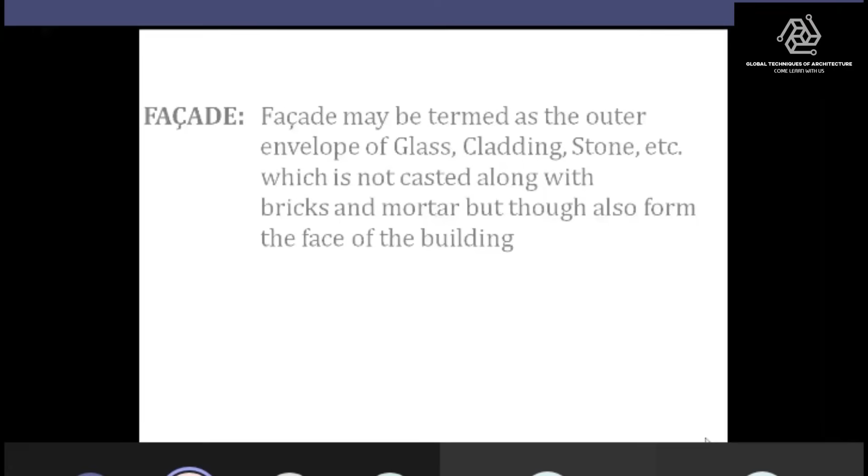Because of facades, you get many iconic shapes for buildings. Now comes the question, why facade? These are points that must be known to every designer, every architect, every guy working in the construction field, so he can answer his seniors and the next generation coming into the construction industry.

It gives you corporate identity, unique shapes, complex designs, results in architectural wonder, pleasing material, see-through elevation, lively building elevations, and also better acoustical performance.

It's a genuine request to all the engineers and architects listening to me that we have ventured into a generation with a very different and varied kind of university called WhatsApp University. My request is don't believe things until you verify them. There are series of photographs where facades are blamed for fire, facades are blamed for excessive heat generated. With the help of a knowledgeable consultant, you can get rid of all these queries.

Facade is not to be blamed, because it gives many advantages over the conventional design, the normal design we used to follow 20, 30 years back. Whatever functionality the facade used to give us, we are now supposed to achieve with the help of a small thickness of glass.

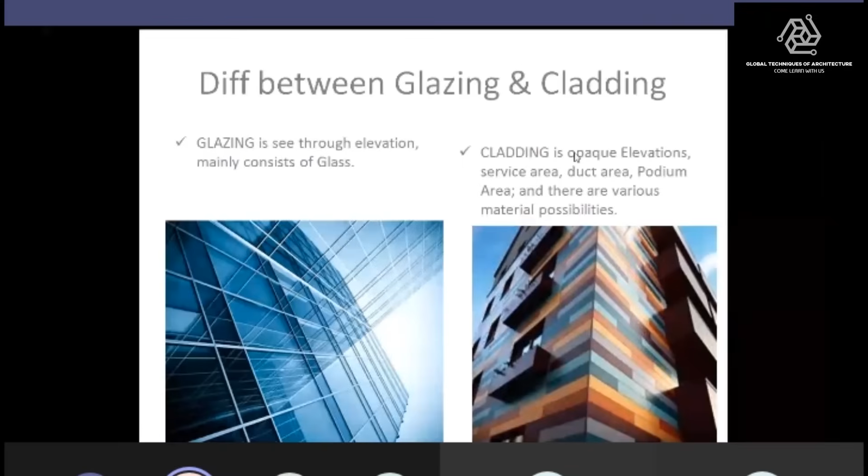Now we come to the materials which are used in facades. The presentation would be much more elaborative, but if you have a notepad, it would make it easier to remember and sail through the presentation without getting dizzy about it. So we'll just touch base with the basic materials which are used and are of much more concern to us. First and foremost, the material we are interested to know is glass.

If you are ready with the notepad, the three statements on your screen, please memorize it, note it down, take a screenshot. Glass as a subject is of ocean's depth. We are not getting into the ocean, but just trying to gain knowledge for facades, for our day-to-day activities, for normal construction activities - what type of glasses are used, where it is used, and how to arrange the configuration of it.

The first statement goes: generally in facade, heat strengthened glasses are to be used. When I say heat strengthened, I'll explain it. Whenever there is a drilled hole in glass, only there use FT glass. What is FT glass? What is fully tempered glass? We'll understand in due course of the presentation.

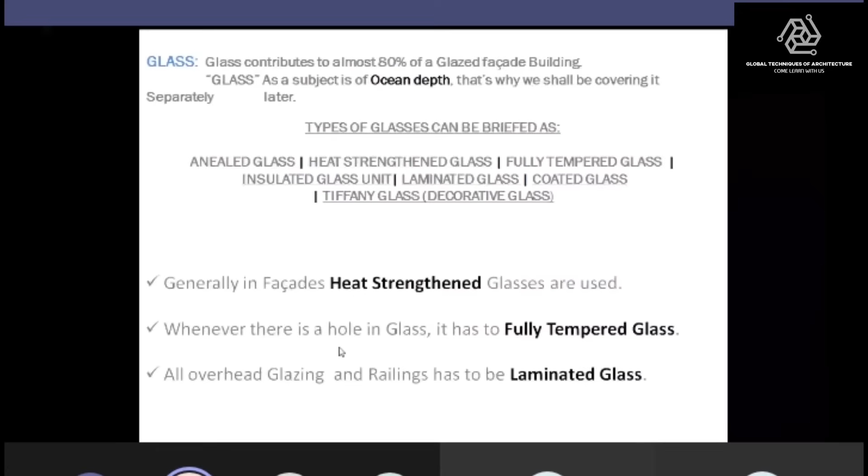Heat strengthened glass has some beautiful mechanical properties: thermal shock resistance up to 130 degrees, 2 times stronger than annealed glass, but the only issue is it breaks down in knife edges. These are the patterns into which it shatters. So next time you see a broken glass, go near it and see if the pattern is of knife edges - by default, it is either annealed or heat strengthened.

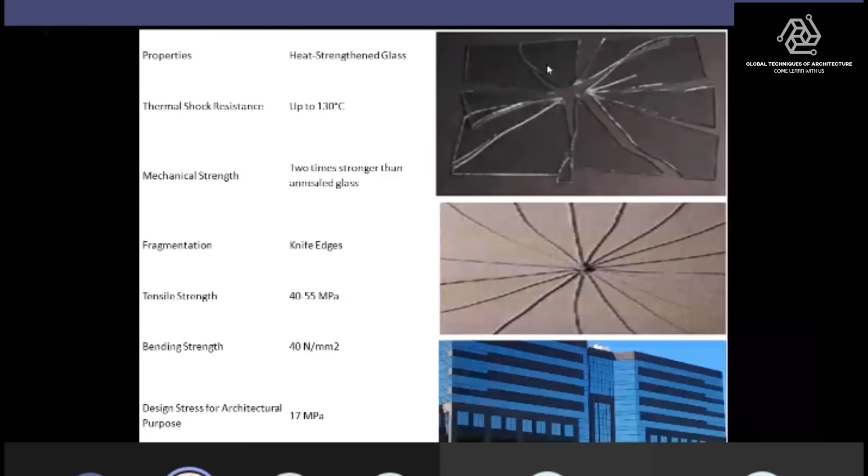Now comes the FT glass, or tempered or toughened glass. The mechanical strength of FT glass is 4 times the mechanical strength of annealed glass. This entire process is called rapid cooling. We heat the glass to 700 degrees Celsius and then rapid cool it.

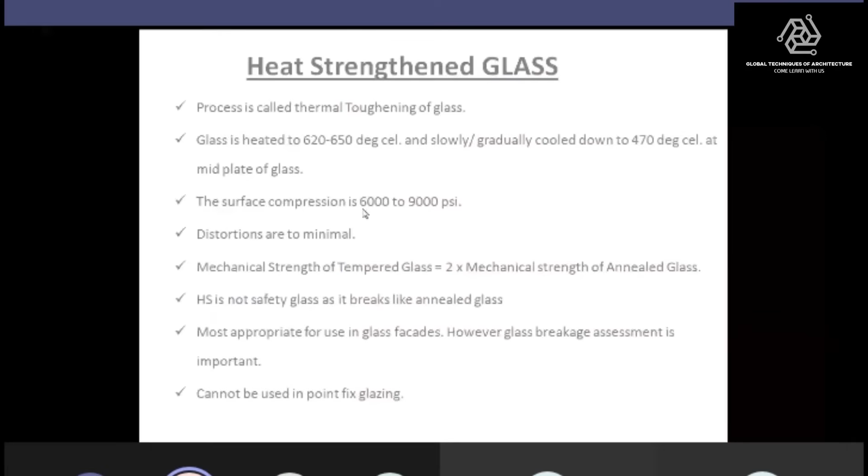There is forced convection, with cool air blown from both sides, up and down the glass. This causes the surface compression to be more. Here we get a surface compression of 6,000 to 9,000 per square inch, whereas here we get 11,000 to 20,000 per square inch.

But since it is quenching, this process is called quenching, so we have more distortion due to sudden cooling of glass. It is also called FT glass, and it is also called safety glass.

Now, many of us, say 99% of us, use mobiles, and on that mobile we consistently use what's sold as FT glass, third-party glass. We buy it and allow it to stick to the screen. But believe me, we are all fooled by the sellers—it is not glass, it is fiber. If that thin glass were actually to be manufactured, the cost would be equivalent to that of a cell phone. So that's not FT glass.

Now comes the problem part of nickel sulfide. One problem we consistently see in tempered glass is spontaneous breakage. The glass is there one day and suddenly it breaks. It is also called the ghost effect. This nickel sulfide is a particle inside the glass as an impurity, and whenever this glass is exposed to the atmosphere during 3 to 5 weather cycles, this nickel sulfide, being a metal, tries to expand and shatters the glass.

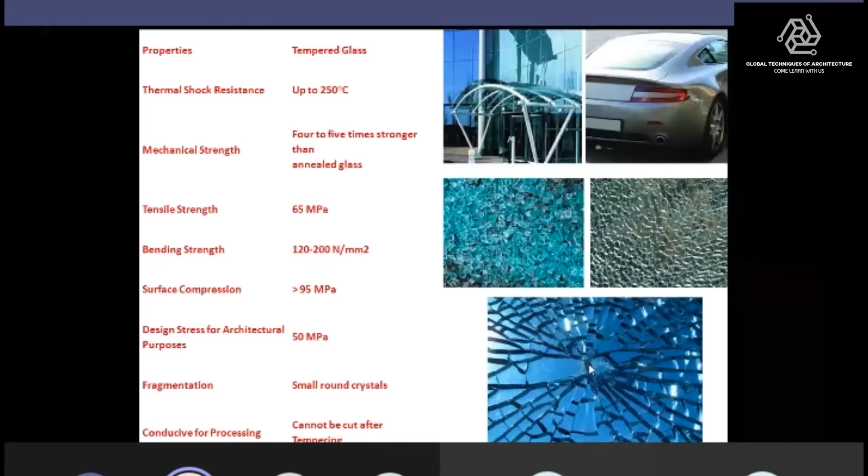Now, to eliminate this nickel sulfide, this NiS, we have a process called heat soaking. In heat soaking, the entire lot of glass is allowed to again go into the furnace. When this glass entirely goes into the furnace, whichever glass has nickel sulfide shatters on its own. So it is again heated.

So you can see the tempering process increases the strength of glass manifold, and because of spontaneous breakage, when glass is heated, nickel sulfide is formed. But when this glass is again heated, inclusions are modified into a form that grows and transforms. Nickel sulfide can change its structure and volume during the heating process. So whatever happens in this heat soak in the furnace gets you the perfect glasses out of it.

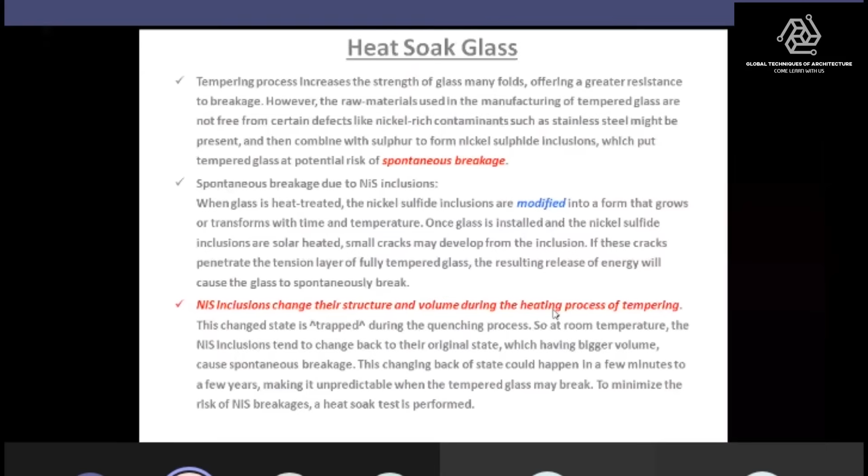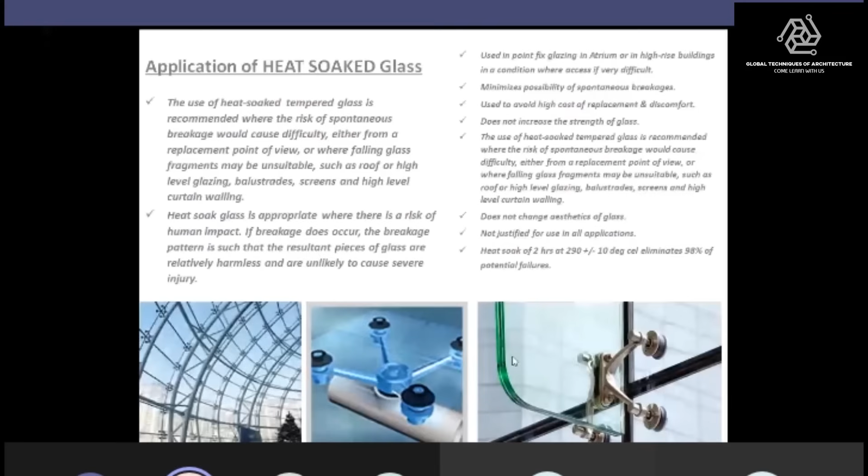But of course, it's a costly affair. So where do we use this heat soak test? Heat soaked glass is to be used when there is overhead glazing. Wherever there is a glass fin system like this, you have to use heat soaking for this part, because this part is a structural member out there.

Then comes laminated glass. So when I say laminated glass—we understood HS glass, which was 2 times stronger, and we understood fully tempered FT glass, which was 4 times stronger. Now when we see laminated glass, we require a safety of more than 4 times that of annealed glass. That's why we took two glasses together and laminated them with the help of a resin between them, with the help of a glue.

So it's a mechanical definition: any two homogeneous materials stuck together with the help of a glue, a layer, or a resin is called lamination. We used that same phenomenon with glass, and when we use this with glass, we get a laminated glass. You see this, called the first lite, and the second lite, of course, is also called glass. And then we have a PVB interlayer.

This PVB is now being replaced by a company called Kuraray. We also know it as SentryGlas Plus, SGP.

PVB in nature was hygroscopic, it used to love water. So if there is a laminated glass and it sees water during rains or during cleaning, it absorbs water and it delaminates. In that due course, the entire purpose of lamination, of having more than four times strength, is lost. Then this company did its R&D and came up with a product called SGP.

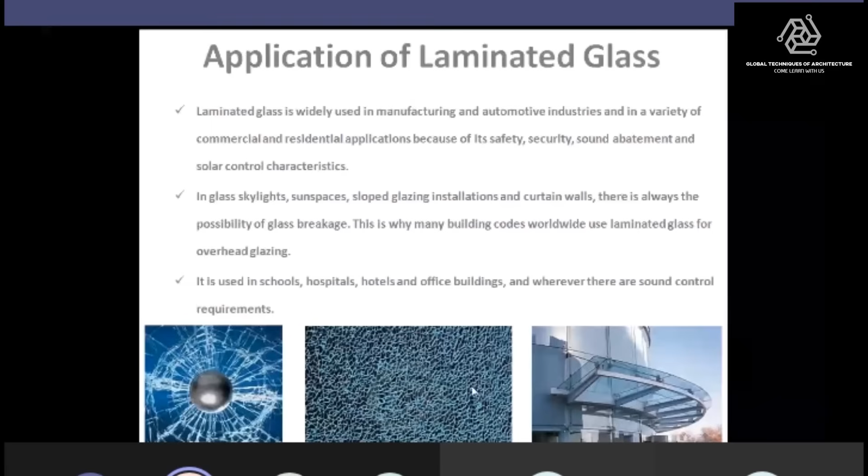So these are two glasses. Now, when IG is to be used and when there is a laminated glass to be used, there is much more confusion in civil engineering fraternity. There are many people who say double glass laga lenge.

When I say double glass, he means this also. The engineer means this also is also a double glass for him because it's laminated. There are two glasses, but there has to be someone to clarify whether the term double glass refers to an IGU or a laminated glass.

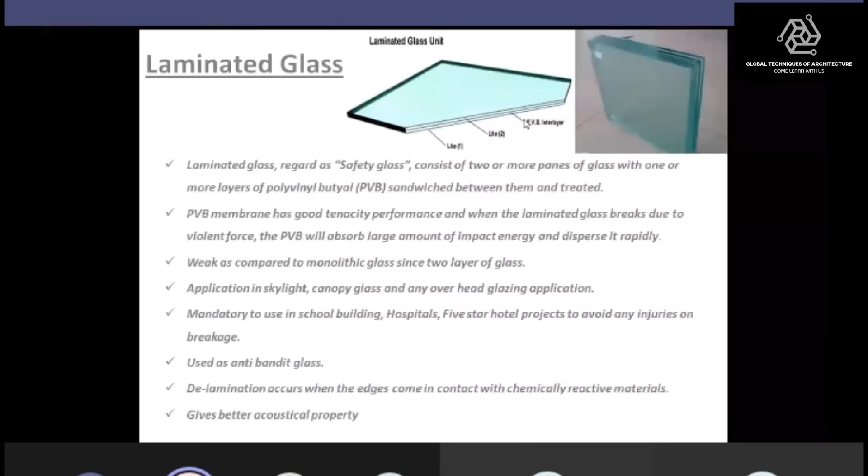So that's why I make a request that whenever next time you talk about glass, it should not be spoken of as double glass. It has to be quoted as insulated glass unit and laminated glass.

So laminated glass are to be used only for acoustic properties. Insulated glass are to be used for thermal properties only.

So when I say thermal properties, just a thing for you to remember is a normal refrigerator that we look at every refrigerator of Pepsi company, Coca-Cola, or any cooling company that gives you those soft drinks. They use this DGU, this insulated glass unit, to hold the temperature inside.

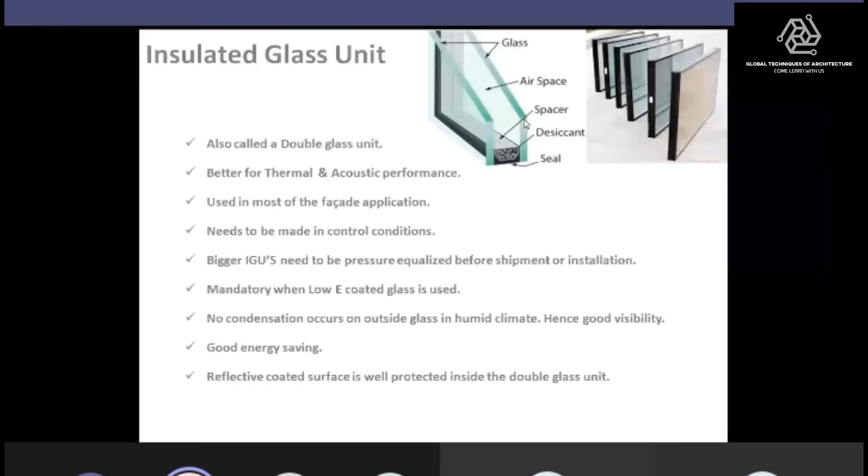So that is IGU. Whereas when you go to any five-star hotel just next to your airport and you look at the glass and you see vehicles passing by and you don't hear the sound, that is a laminated glass. So that completes the glass section, where we touched base about the various glass, where and how to be used.

Now we come back to various materials used in facades. So we start with stone. Stone, of course, was a favorite of all. Stone can be dry stone, it can be sandstone, it can be limestone, what do you call it, sedimentary stone, granite. Then we have bricks, which we had used very vastly throughout history. Glass, of course, we covered.

ACP - now when I say ACP, many of us think we know the subject, we've used it in many projects. But it's again a matter of concern, with the breakout of fires in and around many cities in and around the world, many of us are concerned about the usage of ACP.

Of course, the product is not faulty. It is the specification that was wrong. The guy who was writing down the specification must not have taken due course of attention.

So when I say ACP, these are two aluminum sheets stuck together with the help of a core. Now this core is the element which catches fire, if at all it is a non-FR material. So there are ACPs in the market which are non-FR and FR.

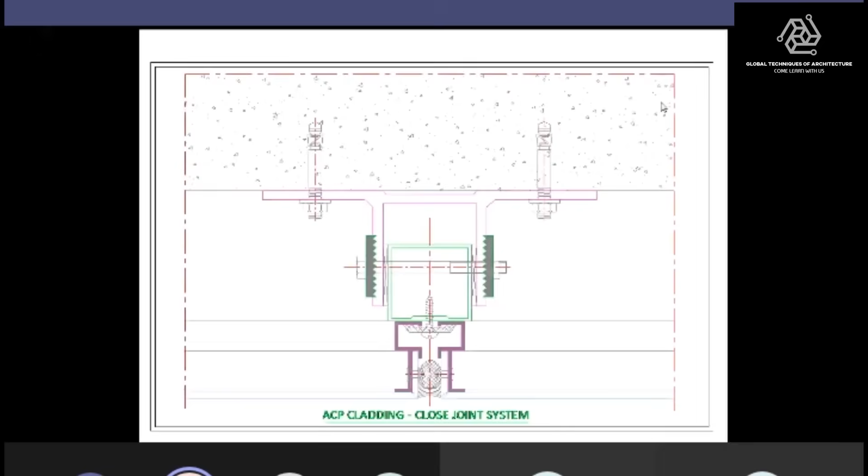So we as designers suggest not to go with the closed joint system. The closed joint system will look like this. So when you see an ACP, this is inside, this is outside. This blue part is the ACP, aluminum closed joint. So this would be the ACP. Of course, this system is very beautifully designed by us.

We see people directly sticking ACP on double-sided tape and then filling the gaps with the help of a backer rod and sealant. Believe me, this sealant gives you stain marks. You can see stains found on ACP facades, and the facade looks really shabby.

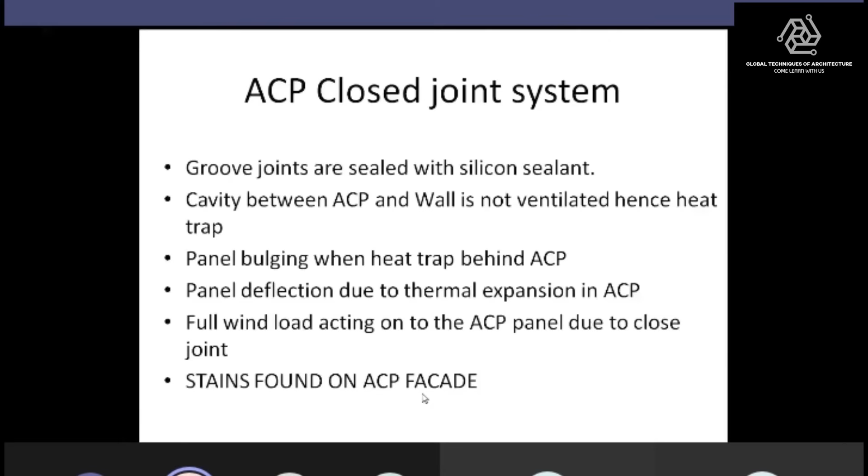And if we are designers... this system is, of course, very much a favorite of all the designers, but we as designers say no to this, because a dirty facade doesn't fetch anybody good value for money.

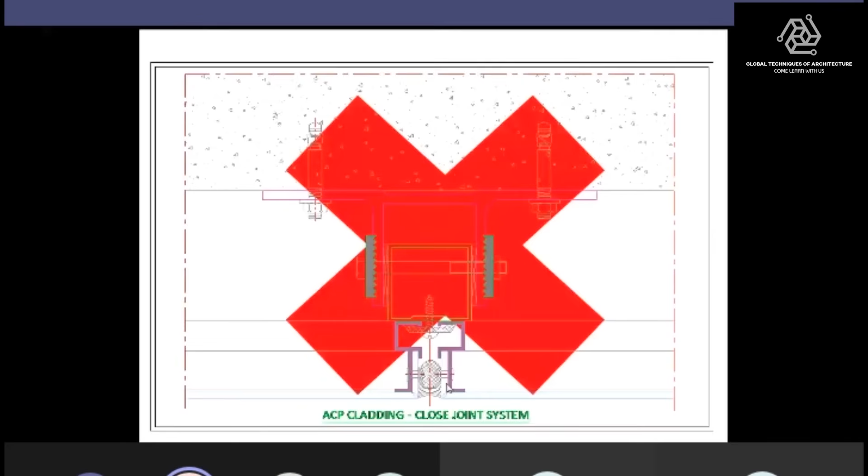So what is the solution for it? The solution is ACP in an open joint. Instead of that sealant, we go with the rainscreen principle. We allow the water to get inside behind the ACP, and we have drainage slots which allow the water to come out of the facade again. The entire cavity is called a ventilated cavity or rainscreen principle.

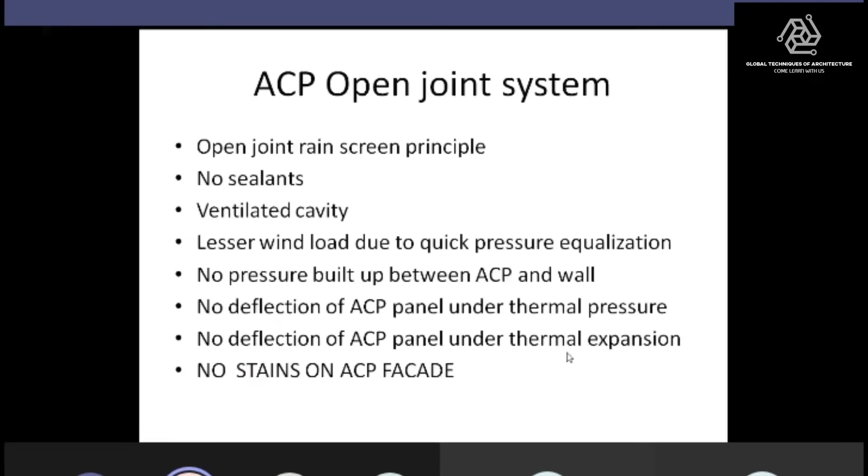No pressure build-up between the ACP and the wall. No deflection of panel under thermal expansion. No stains on the ACP at all. So the detail that you see looks like this.

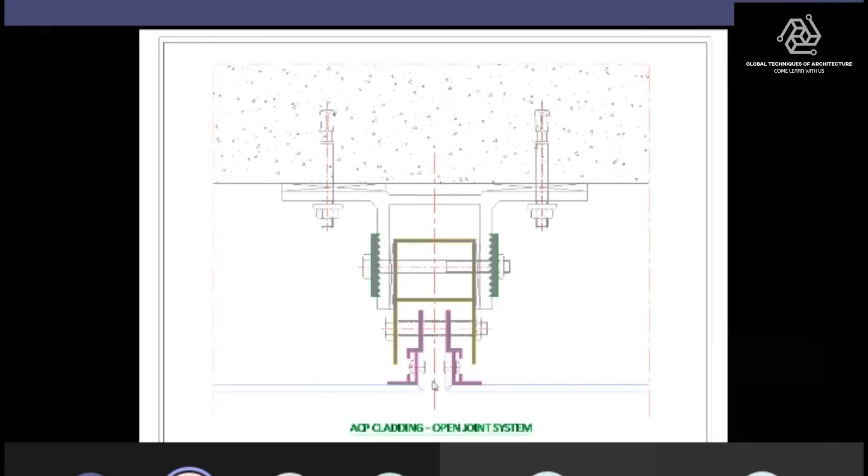It just slightly comes outside the building periphery, because we are using this as an additional member - this frame, the gray color. You again have an ACP and you don't see a sealant. This gap, a standard gap maintained which we ask for, is 10 to 15 mm, depending upon the architect's choice. So this is the perfect system we are talking of. Then, of course, for the podium area, we have much more doubt about what to use, what not to use.

So I have compiled some beautiful products for you. We'll just go through the photographs so that we don't feel that we're looking at new materials, and we don't feel that it's a boring session.

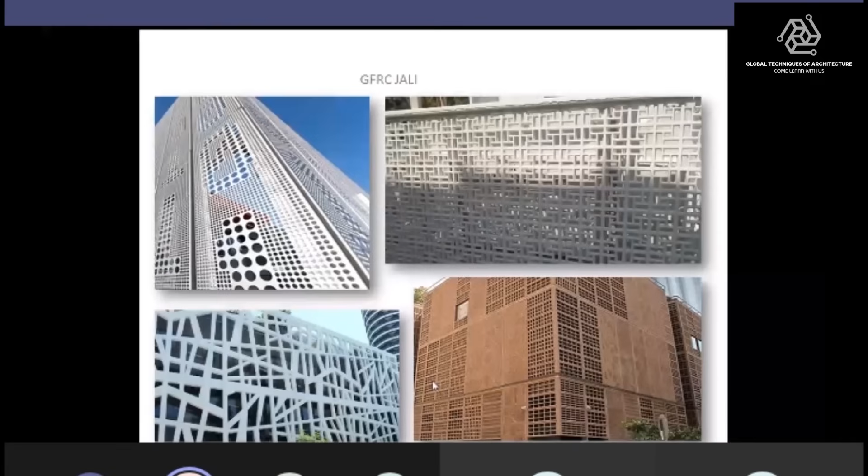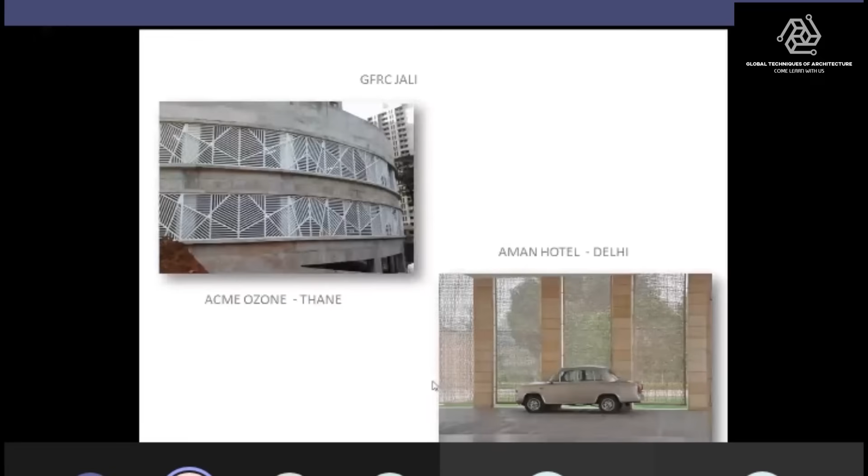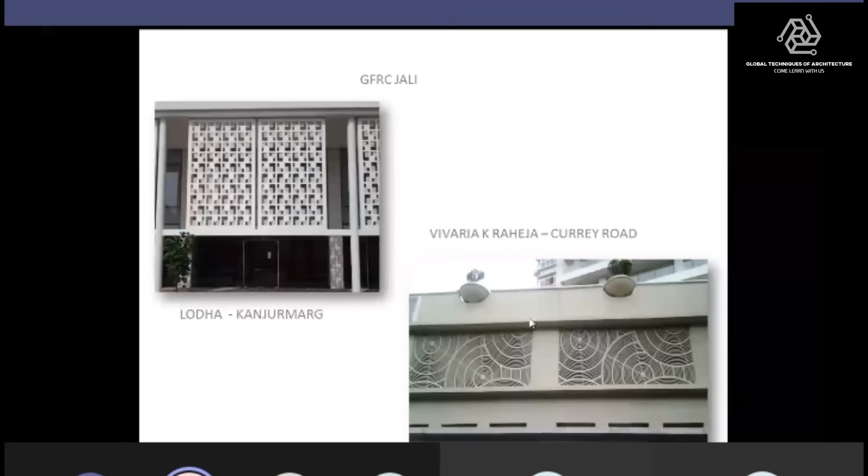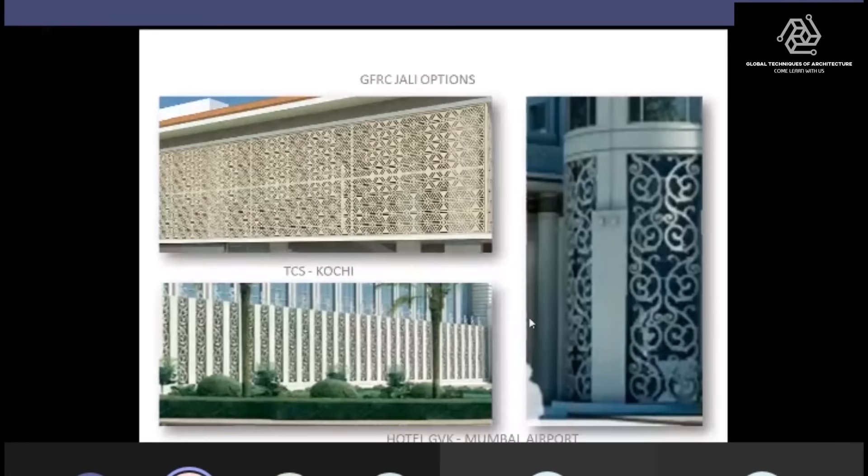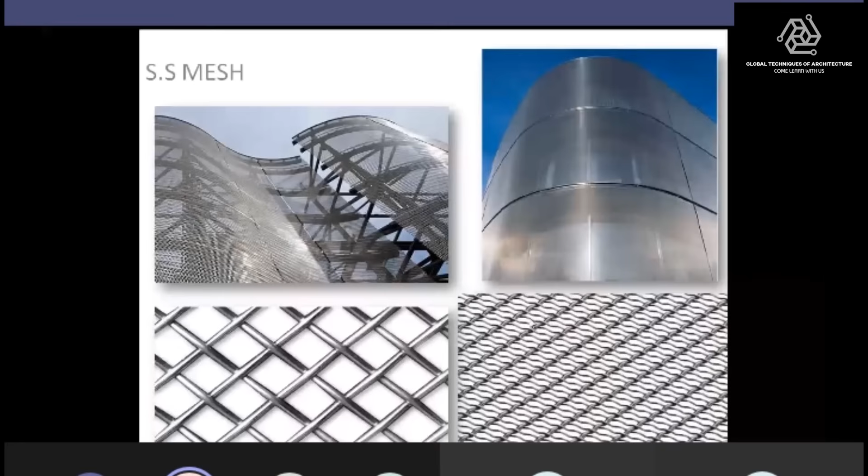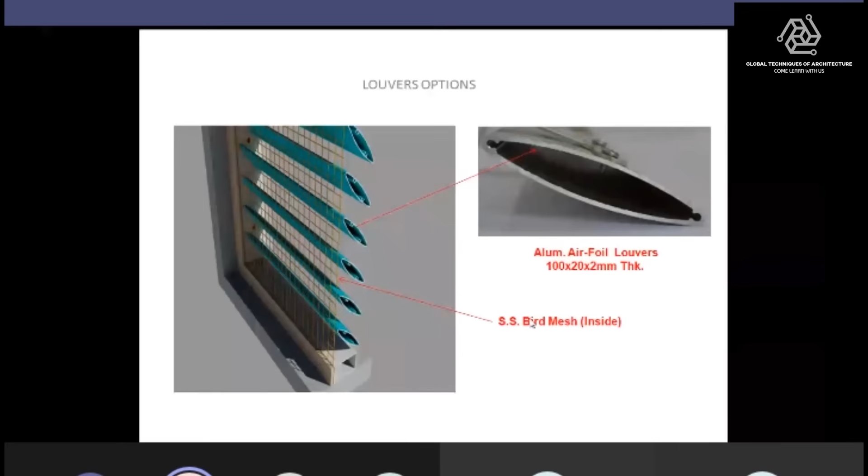Aluminum louvers - now since architecture in India has also started evolving, we come across louvers in many projects wherein the client asks for automation into it. So these are fixed louvers, and the first photograph shows automated louvers.

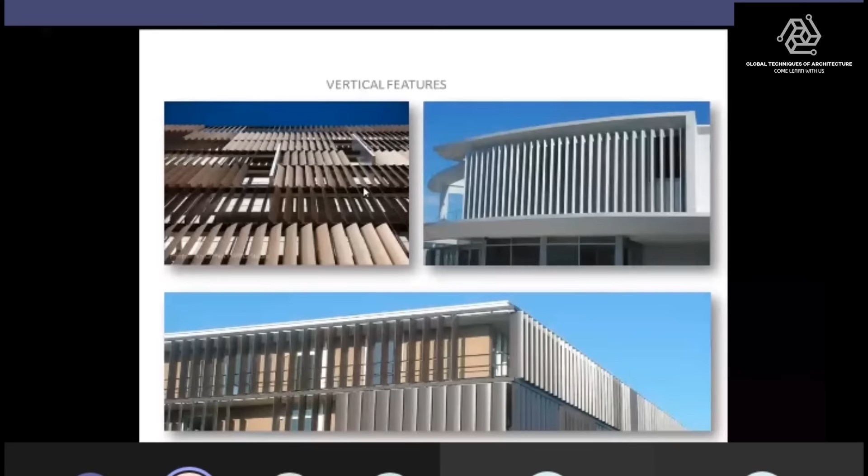Aluminum vertical features, we also call them louvers. These are photographs from the internet showing dynamic louvers, and here are the fixed ones. These are again glass used as vertical features, which falls under the category of louvers only, but this also helps as a self-shading device.

Shera boards, of course, is a known product.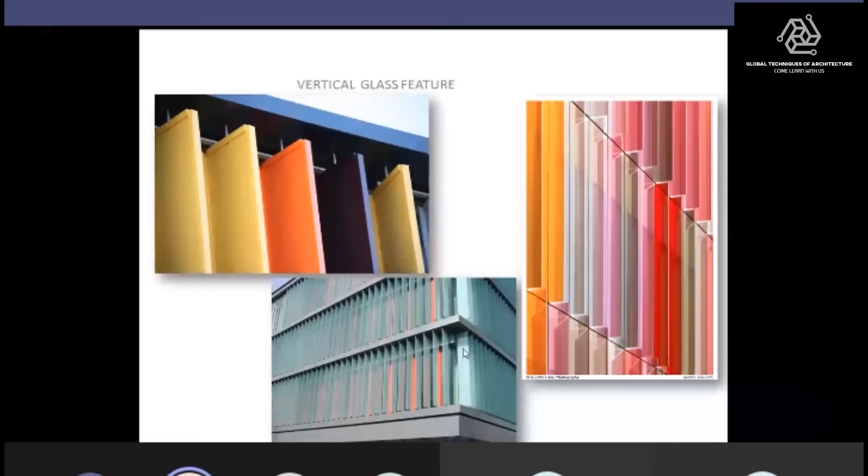Zinc cladding - now zinc as a product is a beautiful material, and the beauty of it is it doesn't fade away with time. They also have ZCP, zinc composite panel, but zinc as a material, if you put it onto your elevation, it gives you much more aesthetic appeal. The richness, or say the glow for the entire building, is superb.

Corian cladding - as designers, I have my own hesitations to put this onto the exterior. Onto the Worli, the tallest tower that we see - Shriram Mills, the Palais Royal or Palace Royal, many people say - the intent is to go with Corian cladding. I don't know when it will be finishing off, but whenever it finishes, Corian would be used for the first time as an external material in India.

These photographs are all from the internet, of various projects by friends and colleagues. It looks beautiful, it remains white. I don't know how it reacts to dust and the climate that we are in.

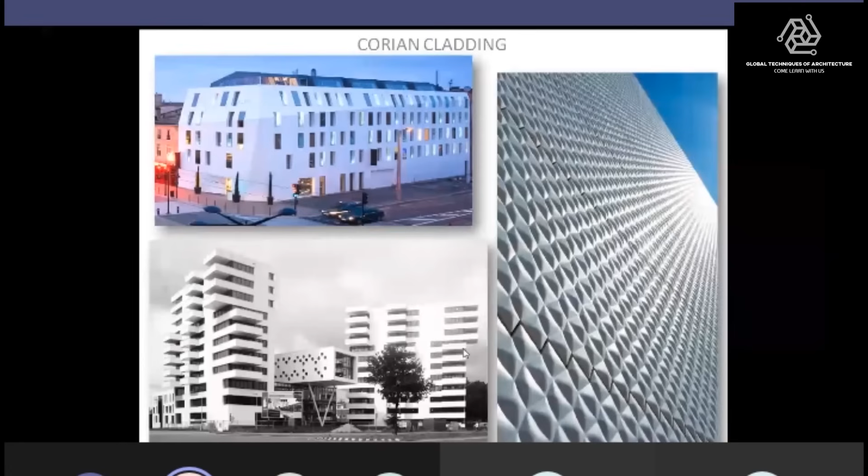Then we have a product called fiber reinforced plastic. Of course, this product is not sold in India because of the NBC - the NBC says no plastic materials are to be used on elevations, as it is combustible in nature.

Wood veneer cladding is known to many of us. We use veneer cladding onto the exterior.

Natural clay tile, also known as terracotta - many of your KRC projects have it. These are extruded like aluminum; the tiles are extruded in nature.

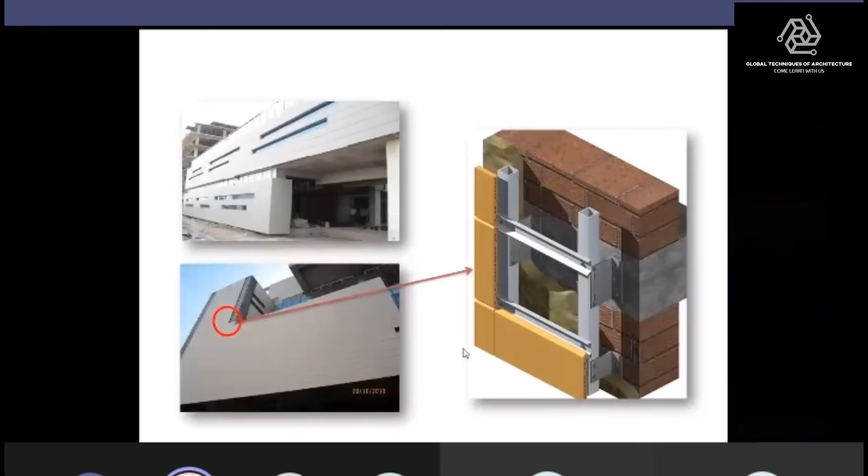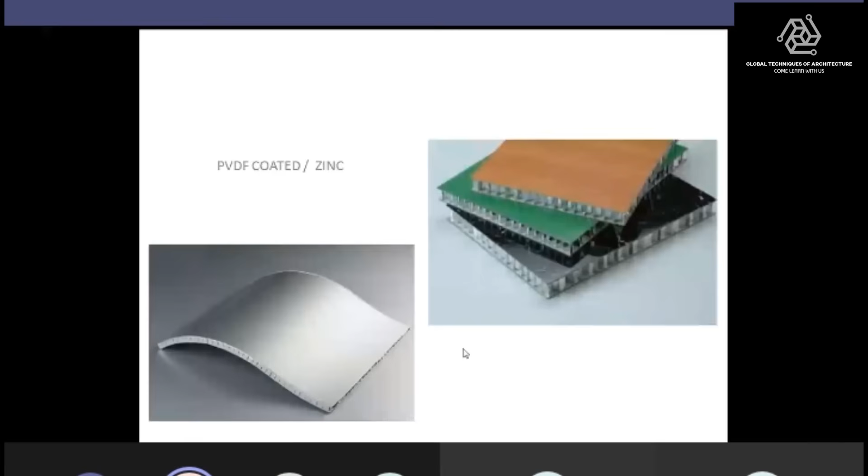Then we have honeycomb panels - these are some of my favorites, wherein a thin slit of granite is stuck to a honeycomb like this, and the weight exerted by the granite on the civil structure is reduced to a quarter. So if 1 square meter of granite 30mm thick weighs 80 kgs, by using this honeycomb system you'd be utilizing only 20 kgs, and yet the look and feel would appear as granite only.

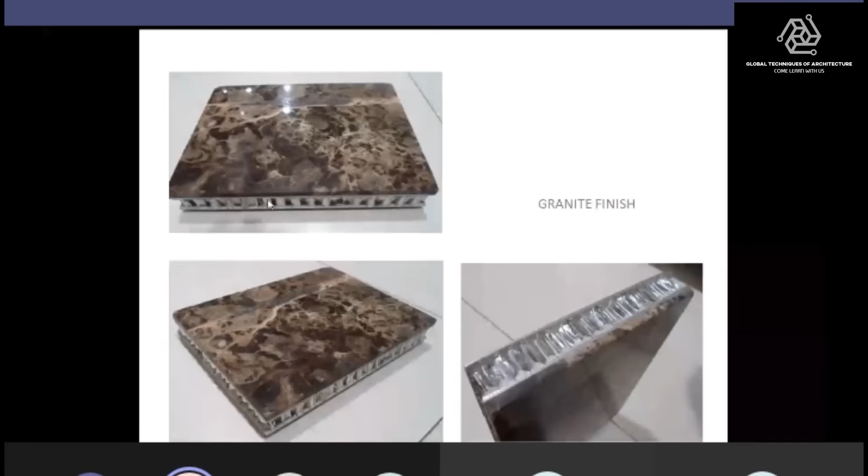Then we have vitrified porcelain slabs, vitrified tiles, and porcelain tiles. Now this is a new material which was also explained to the KRC team for various projects, for the cladding part and for the spandrel area insulation.

Instead of ACP, we can use porcelain tiles which have just a thickness of 3mm and exert minimum load onto the structure used for facade. The best part about these porcelain tiles is that they have an anti-shatter mechanism of film or mesh behind them, so even in the worst-case scenario if it shatters, it doesn't fall off easily.

We have one project at Thane which we did with a similar product called Laminam for Deepak Goradia Saab. Dosti Imperial is the project's name. Whenever you are free, after lockdown of course, you can go and have a look at it. It looks really beautiful.

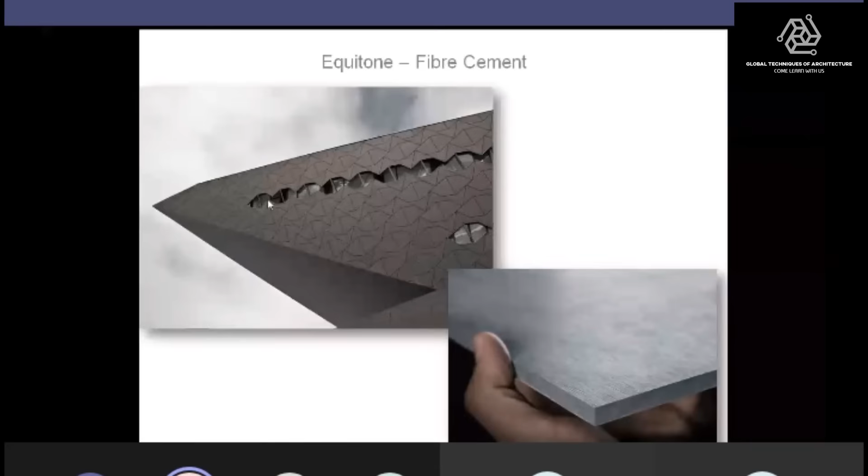Ceramic tiles are known to all, fiber cement boards are also known. I've clubbed all these materials together just to have a knowledge about them. Yes, these are the materials we know, but I'm presenting it to you consolidated.

HPL, as a designer, I have my own limitations and questions about it, but as a product it's been widely and variedly used across the world. As a mechanical engineer, I found this material to be of much more concern because the base of the material is paper. The laminate is created by pressing 60 sheets of paper, gluing them together, pressing them and rolling it out in the form of a sheet. So the manufacturer says it comes with a fire-rated property because of the glue, and no weathering effect. But somewhere I have my own limitations on using this material for the external part. Yes, these have been widely used across the globe.

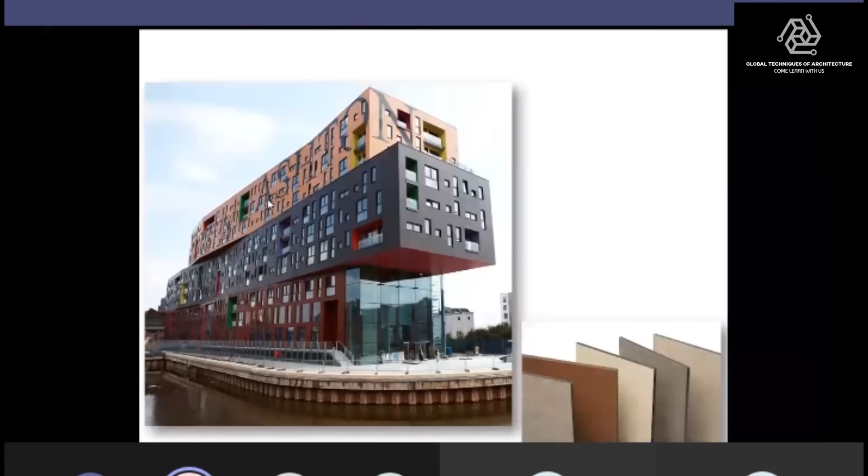Then we start with the basic system, curtain wall, aluminum system. When I say aluminum system, there are many doubts among people - what is a curtain wall, why is it being used? In this session, we are not covering windows and railings, only facade systems for commercial buildings, since we are talking to the KRC team. So what is a curtain wall?

Curtain wall is defined as a thin, usually aluminum framed wall containing infill of glass, going from floor to floor. So some basics we need to revive - horizontal members, you all must be knowing this too. Horizontal members are called transoms, we'll be addressing them as transoms. The vertical ones would be called mullions.

These are casting channels. At the time of installation, at the time of casting itself, these casting channels are taken near to the edge of the slab, marking a minimum distance around 100 to 150. These are installed and ready to receive the facade. The bracket is used and can be installed by just inserting the anchor into the casting channel. And then, of course, some spider glazing and spigots.

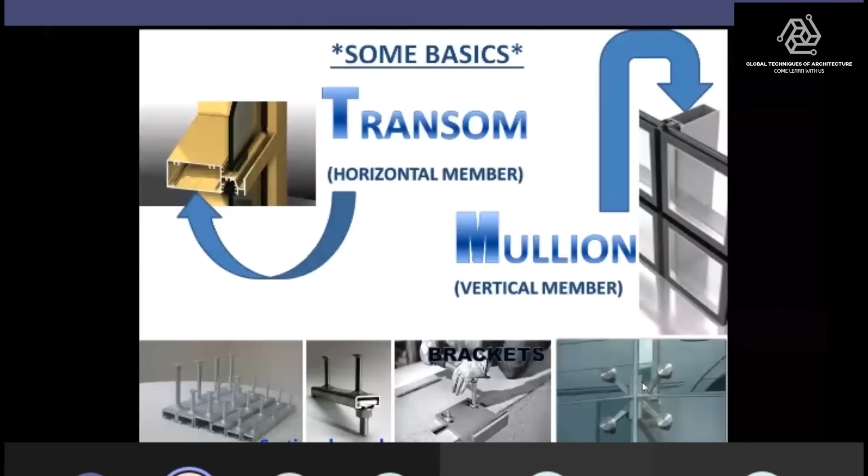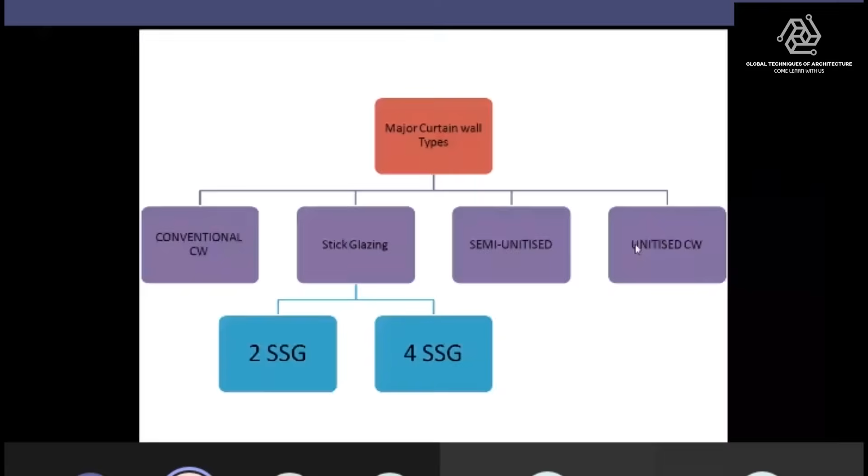So these are the things we are going to cover - major curtain wall types. We started with conventional, the name itself suggests conventional, purana, old. Then we came up with stick glazing. The entire facade fraternity started from curtain wall, went to stick glazing, went to semi-unitized, now unitized. If the KRC team allows me to present in the next session, we would talk about futuristic facade - how will the future look like? So first of all, we are covering till now, say 2020. What will the facade look like?

So we start with conventional curtain wall. What is a conventional curtain wall? Normally this is a detail which was used 20 years ago, 15 years ago. You see this horizontal member, transom. The glass being mechanically held - the glass is held with the help of this metal, and we avoid metal-to-glass contact by using these gaskets. The glass is fixed to this frame with the help of this pressure plate, and then we have the cover cap. The architects don't like to see nuts, bolts and screws, of course, so we see this screw is being hidden.

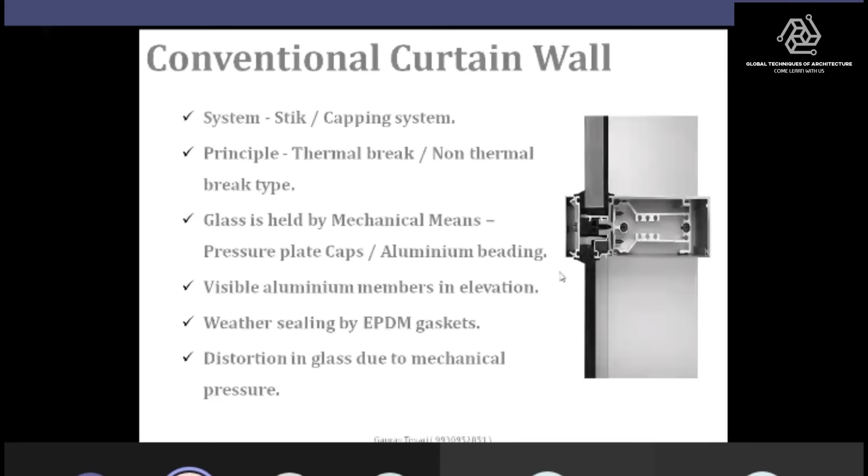Now with the usage of this diagram - of course we all are engineers, we love to see the exploded view - how will it look, how will it look? So that's the vertical mullion, that's the horizontal transom. The transom gets screwed to the main mullion with the help of these fixtures.

Then we have this gasket. This is the pressure plate with the gasket that holds the glass, and then there is a cover cap. Now this cover cap can be of any shape - square, elongated rectangle, aerofoil, or bull nose.

Now, as designers and engineers, we are happy about designing this system. We can install glass perfectly fine. Now what happens is it is labor dependent, and you require scaffolding, the H frame, or what we locally call paranchi. So paranchi is a need of the time here.

We have to use paranchi for 100% installation, and the installation happens from the outside periphery. Now imagine a project like Kohinoor Square or Ruby Tower, wherein there is just a road on the outside of the project. Can you erect a paranchi there? The answer is no.

And also, since it is labor dependent, and since these gaskets were initially used as rubber gaskets, due to weathering of heat and cold, they used to shrink. So when they used to shrink, they used to allow water to get inside the system and cause possible leakage. Also, since it is labor intensive, laborers are supposed to carry smaller glasses and cannot utilize bigger glass panels.

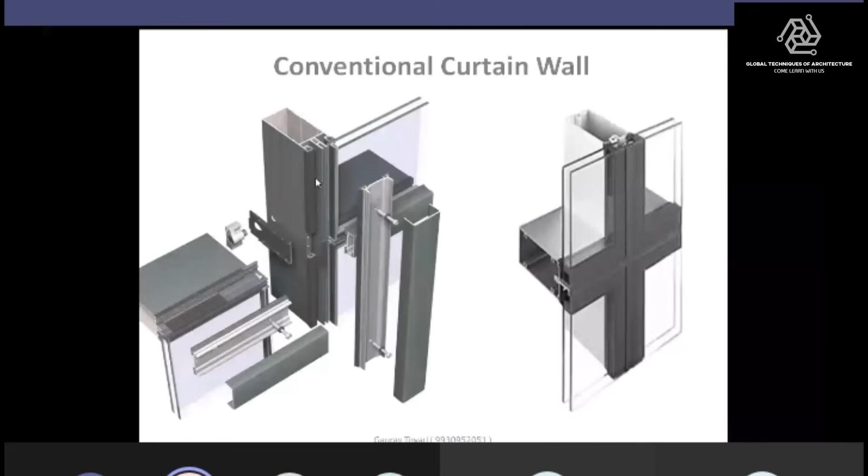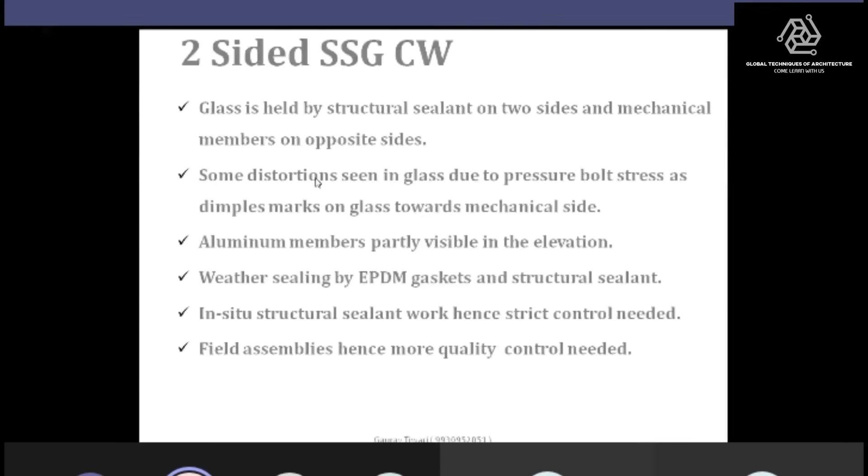So then we came up with a beautiful system using sealant. We decided to cover two parts of that rectangle glass, either vertical or horizontal, using two-sided structurally glazed sealant. So here if you see, these parts are with sealant - the vertical ones are with sealant and the horizontal ones are with a pressure plate cover cap. So wherever you see a horizontal band, it's a two-sided SSG, two-sided structurally glazed curtain wall.

So still the difference is you need scaffolding. Still there are dimple marks onto the glass. Still the architect's perspective is not served. So then we as designers came up...

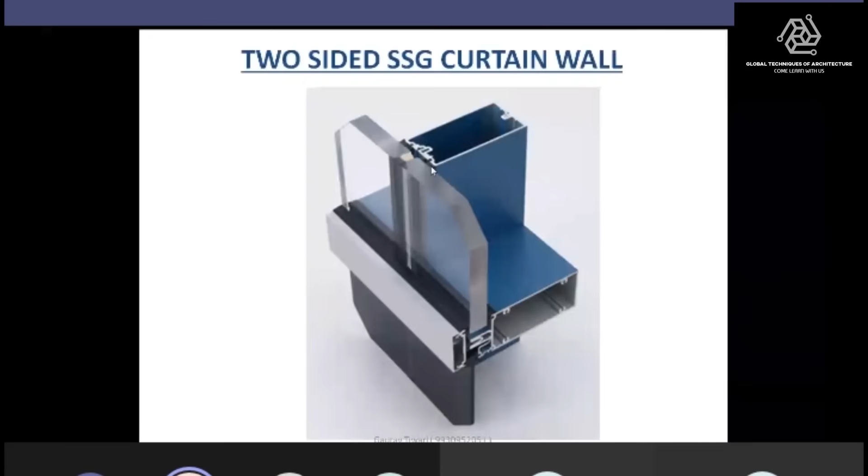...with the solution of utilizing structural sealant on the entire four sides. So when I say usage of this into all four sides, we said okay, let's go with four-sided structurally glazed. So glass is held by structural sealants on all four sides, with no visible aluminum member from the outside.

So the usage of four-sided created an architect-friendly environment wherein he wanted a glass-to-glass joint. He didn't want to see any aluminum visible from outside, either horizontal or vertical, and there's less distortion since there is no pressure plate and screw mechanism.

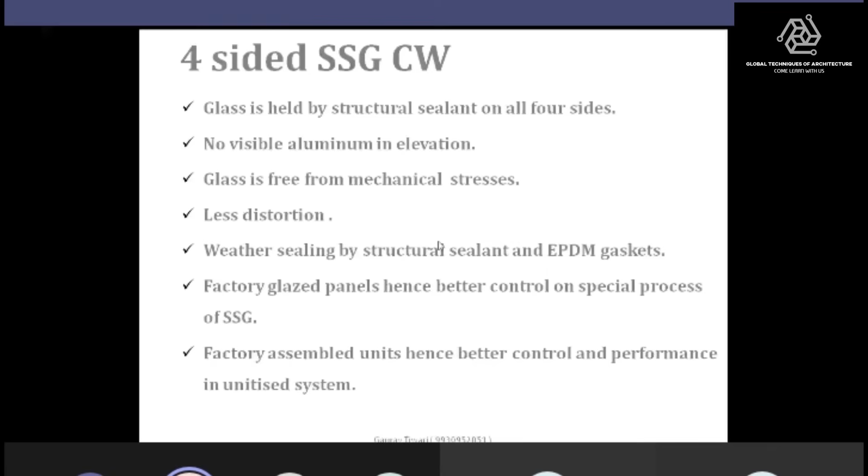Weather sealant with the help of EPDM gaskets - initially it was sealant, now we have started using EPDM gaskets. So this is the thing wherein initially we started using a weather sealant to fill the gap, and now this entirely is a glass to glass joint. You can see this glass to glass joint, and this is the weather seal. So the intention of the architect was 100% met, and he was very much happy about that. Yes, this is possible.

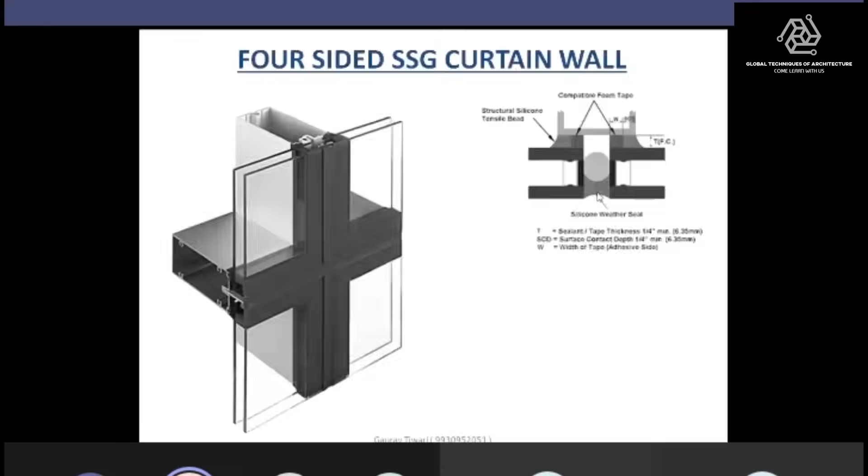Now, since we are capable of four-sided structurally glazed, we decided let's utilize a factory setup. So we decided to go with a semi-unitized curtain wall. Now, when I say semi, it means half. Unitized means a plug and play mechanism.

So if you look at it from the mobile perspective, initially we used to buy Nokia phones, say 15 to 20 years ago. Nokia phones used to come with a disk, a CD, a data cable which would be separate, a charger which would be separate, a hands-free which would be separate. Now we go and buy a smartphone, we spend more of course, but one data cable and one charger adapter serve many purposes, right? So that's called plug and play. So semi-unitized - unitized is just plug and play.

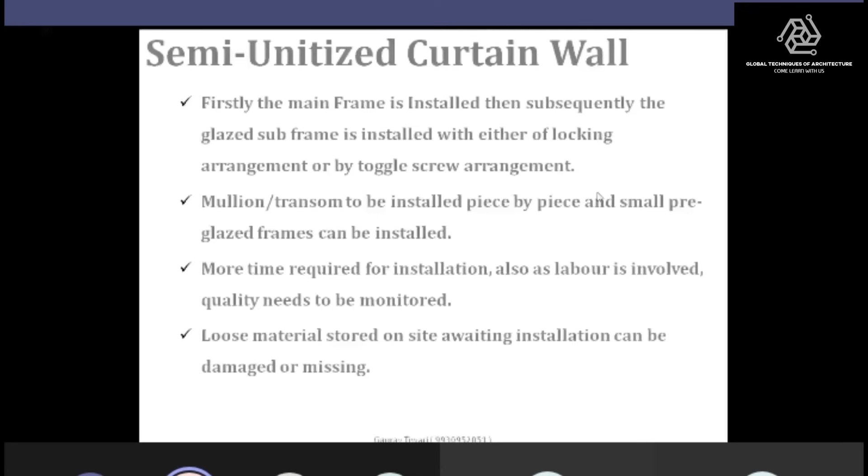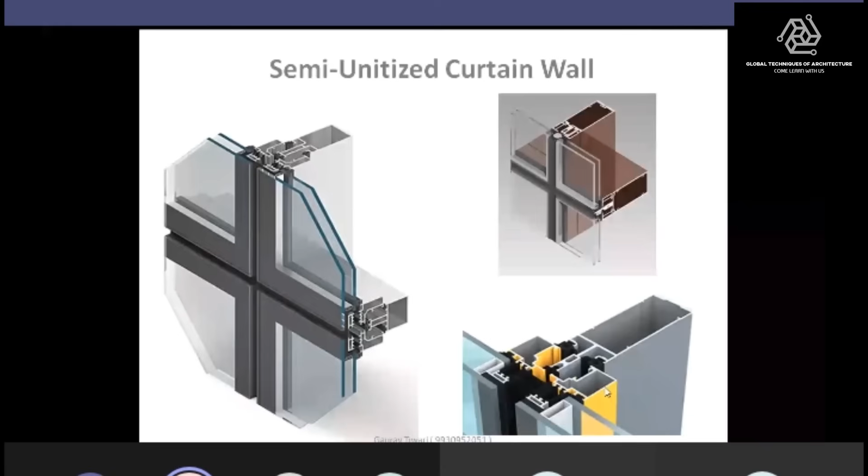So then we decided to come up with a beautiful system called unitized. I have a video of it which we can share once we are done with the presentation. In unitized, the complete system is plug and play, and the entire thing is called positive negative locking, also called male female junction. The water tightness we get into unitized is phenomenal. There is no leakage, and there are no loose components at the site.

The installation expedites by almost 40%, and the water tightness is perfect. So if you look at this picture, you get to see this being the female part, this being the male part, the positive and negative locking. So the entire frame to frame, floor to floor is done like this.

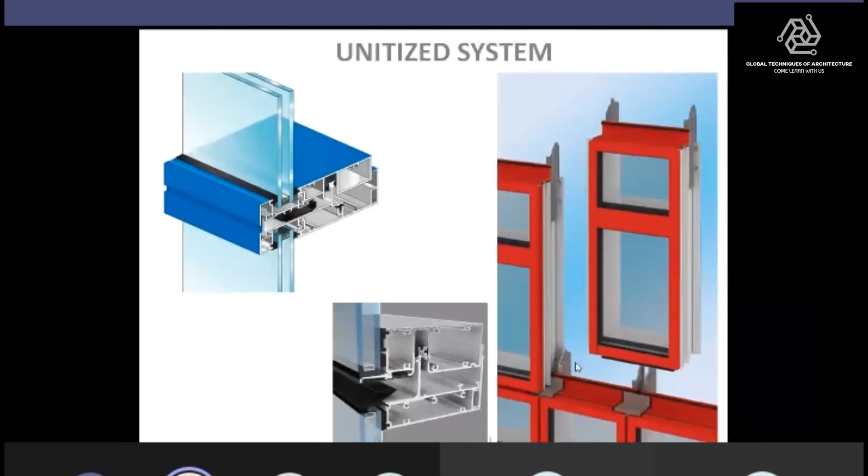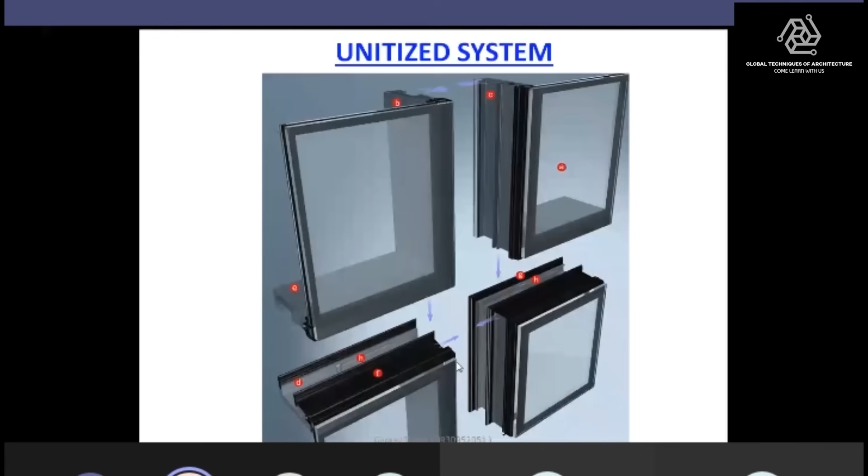Just a quick animation to explain to an engineer: excavation, then slab and column, then bracket, panel, bracket, panel, bracket, panel. So the installation becomes very fast.

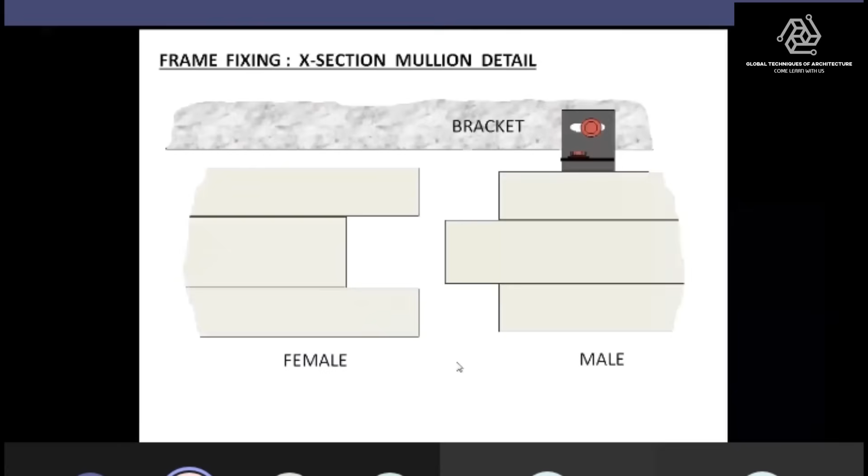And that's the type of bracket. Of course, we use two anchors and two holes for having it. Fixation happens in this manner, and frame fixing is done so this part is ready to receive the next panel. This part would be considered as positive, and the next part would be negative. So you can go with a vertical height of almost 90 stories and nothing happens.

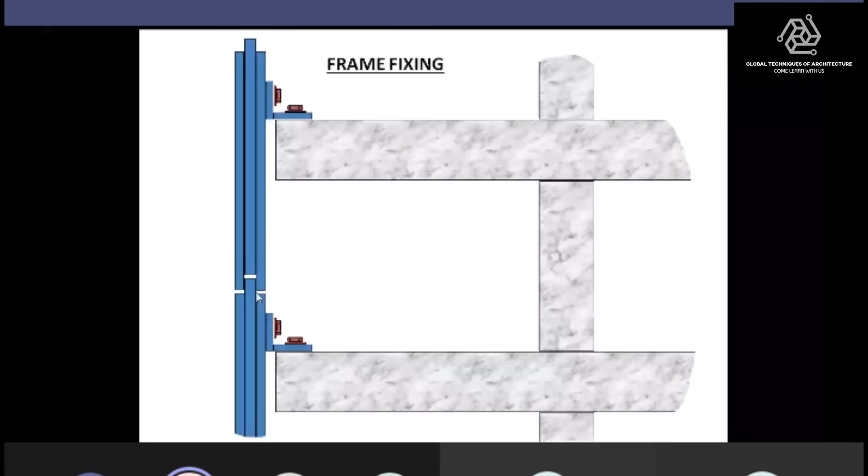And then comes the point fixed glazing. We are almost nearing completion of the presentation, wherein point fixed glazing is again a very prominently known phenomena, but not many people know it. We have seen it at many places, but not many people know that these can be done into various patterns and fixity details, depending upon the conviction of it, how the architect has conceived it.

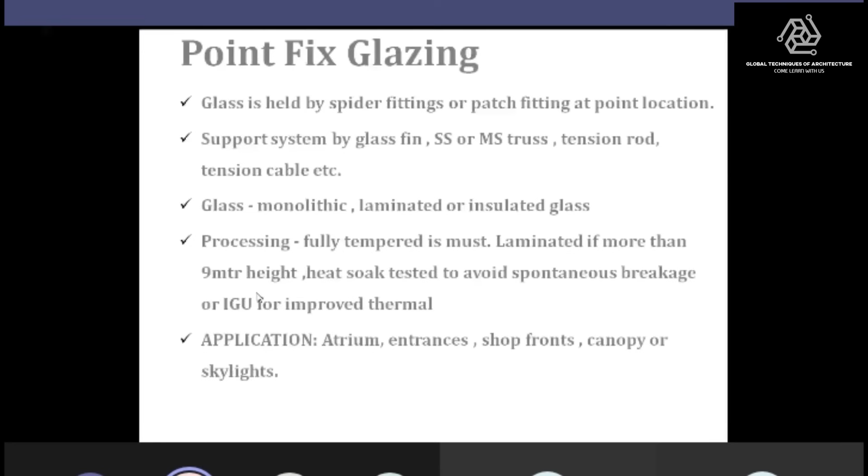So the first thing we start with is the tension rod system. When I say tension rod, it has a zigzag pattern, and you can see this at the Mumbai International Airport. At any given point of time, the rod remains in tension. So whether it be positive wind load or negative wind load, the horizontal rod consistently remains in tension. We call it the tension rod system.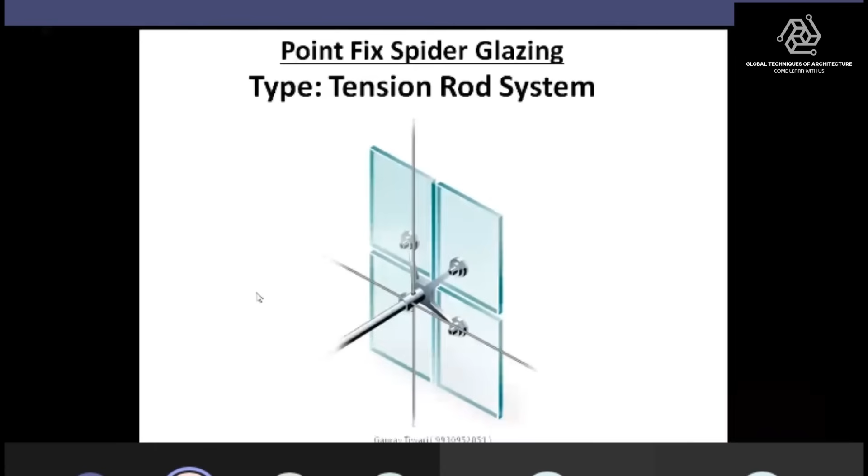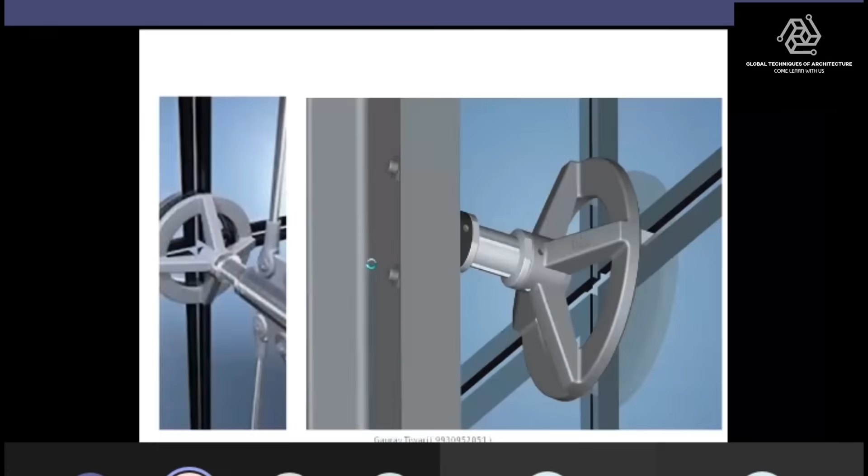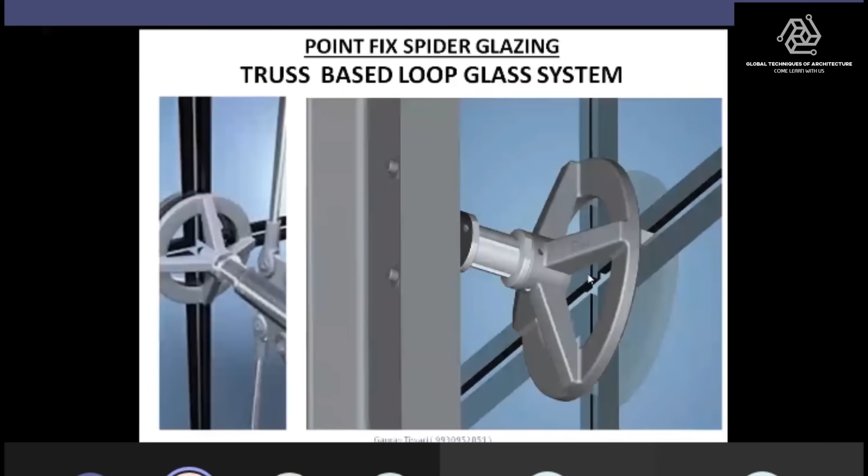Then we have a glass fin system, for which we need to install heat soaked glass, laminated heat soaked glass. What you see over here is a splice joint. Then we have a truss based system. We also have a glass loop wherein there are no glasses, there are no drill holes into the glass. So that is again a beautiful phenomenon.

So just to make people more aware of what are the systems. Let's move further.

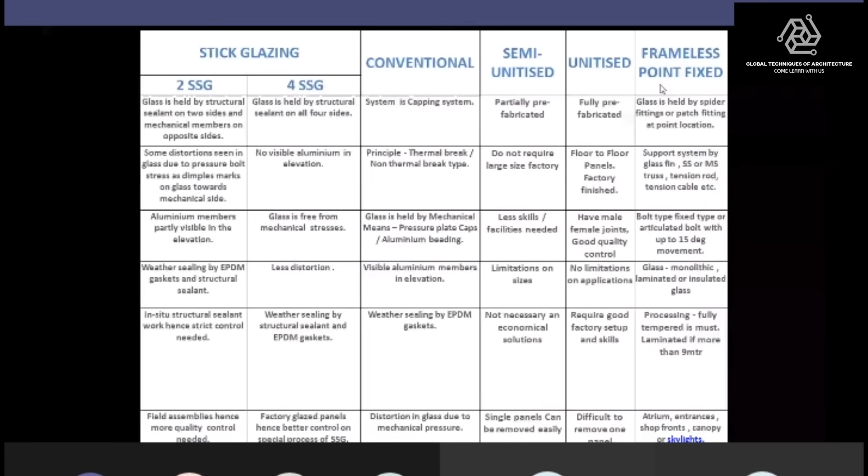When we try to get inspired from those projects, we must also try to acquire the methodology, design, or QA/QC process that those guys follow. In that due course, what we neglect under the banner of value engineering is facade testing. Of course it's an expensive affair, but onto the overall project cost it is not even 1%, not 0.1%, forget 1%.

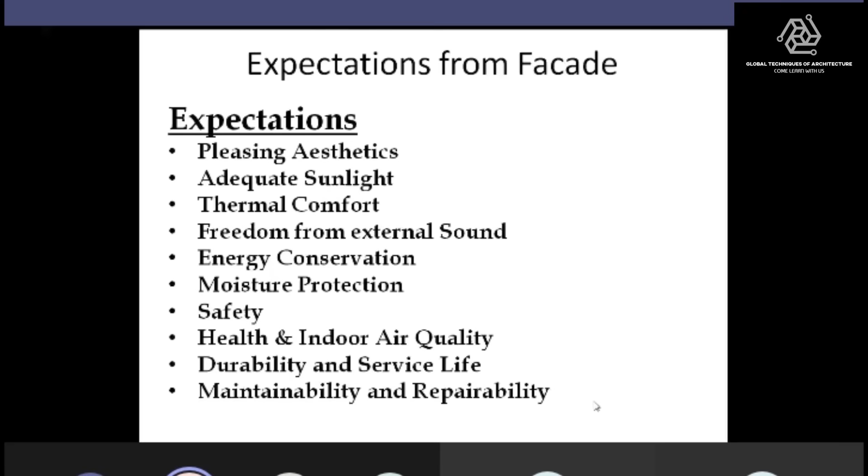Moisture protection, safety, health and indoor quality maintenance, durability, maintainability, and of course repairability. So why do performance testing? An architect's vision is only till the design stage - concept, design, specification, structural calculation, shop drawing.

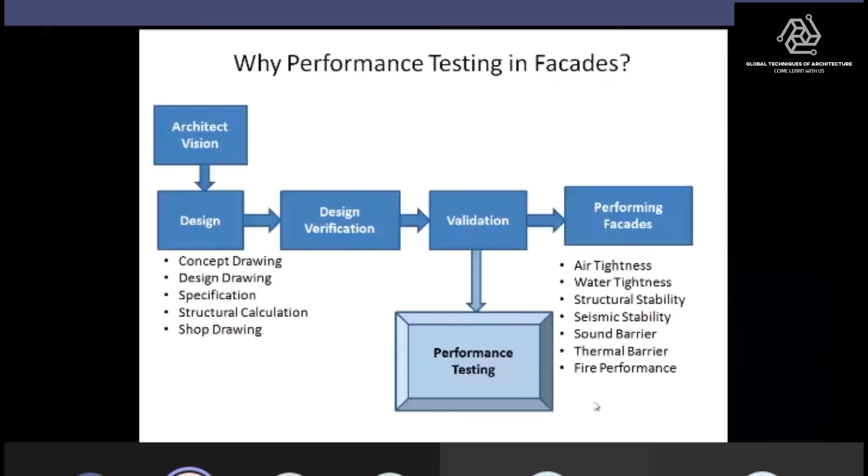How do you verify whether this design, which is supposed to be going for 3 kPa or 4 kPa or 5 kPa, is perfectly meeting those standards? How will the verification or validation occur? Only with the help of performance test. How does it happen? On paper, to validate these by actual testing, we do this.

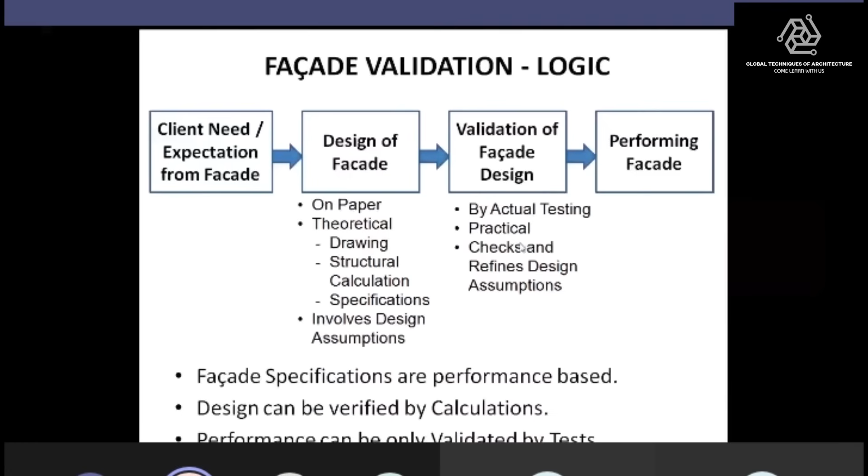AAMA standards say that for a performance test, there has to be 3 grids and 2 floor height of the entire mock-up. So it is not like testing only one piece of glass. It is not testing only one frame of aluminum. It is not about testing only sealant. It is not about testing an anchor pull-out test. It is a test for the entire assembly - that is performance test.

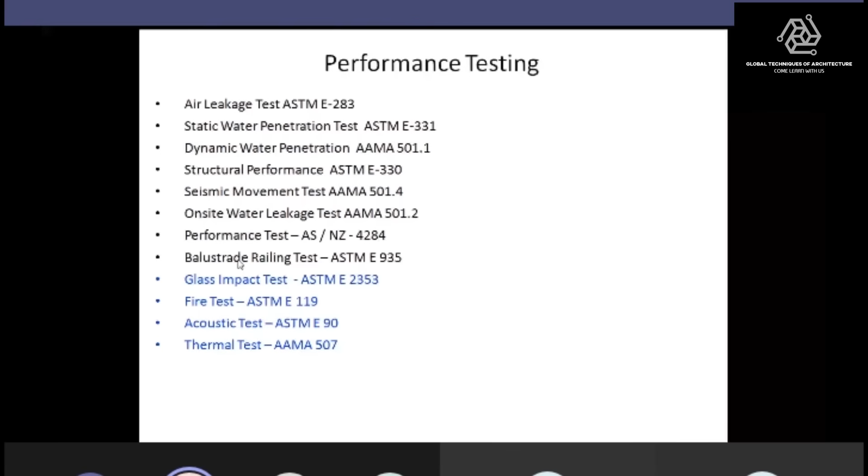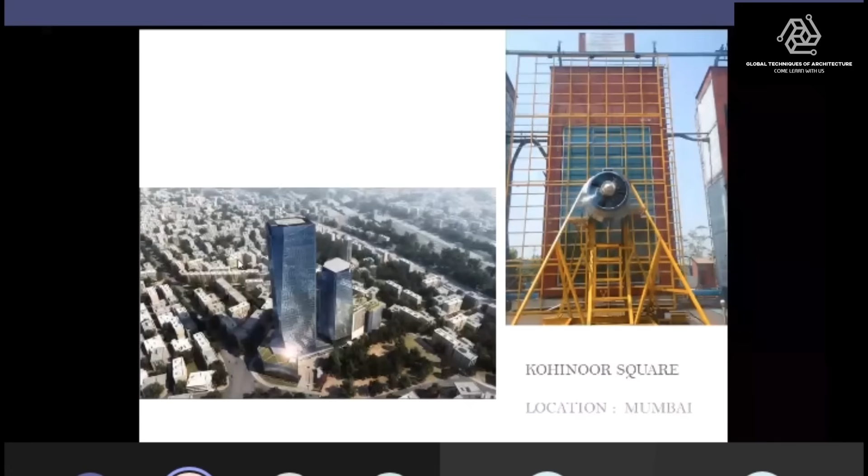If you look at these images, actual photographs - that's the Kohinoor square cut test which we carried out at a lab at Murwad for facade testing. Even corners can be tested. And also for on-site test, as per AAMA 501.2, we can be carrying out these.

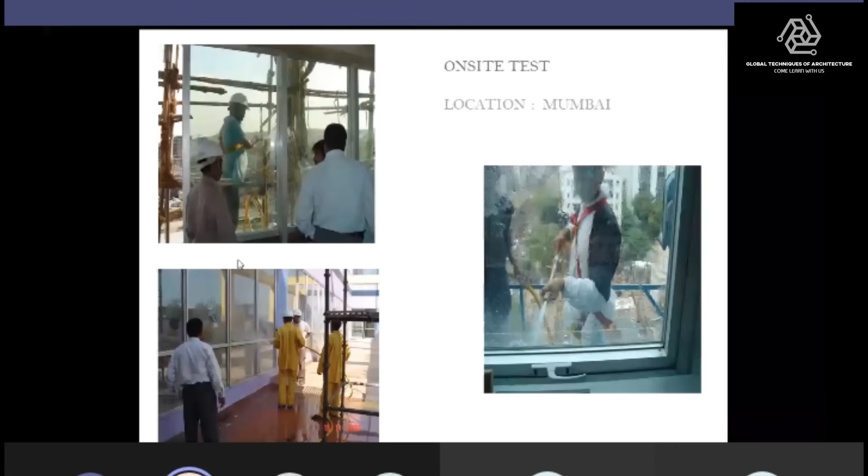So in order to reduce or prevent that glass breakage, these are the pins that come out of your facade, and your swinging stage can be anchored to it. So these play a very vital role in stabilizing your gondola for cleaning purposes.

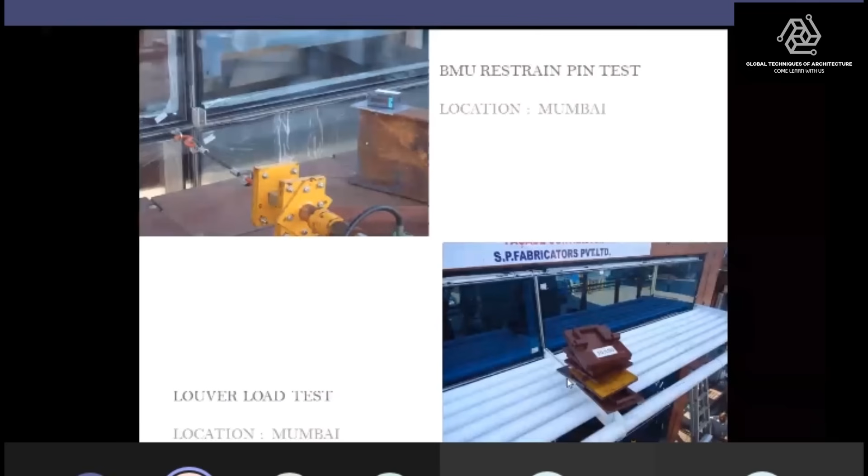And of course, when you have louvers, there is a specific test as per ASTM wherein you design and envisage a guy standing onto the louver with the help of a bucket of cleaning water to clean the surface. So that is a louver load test. That completes the training session.

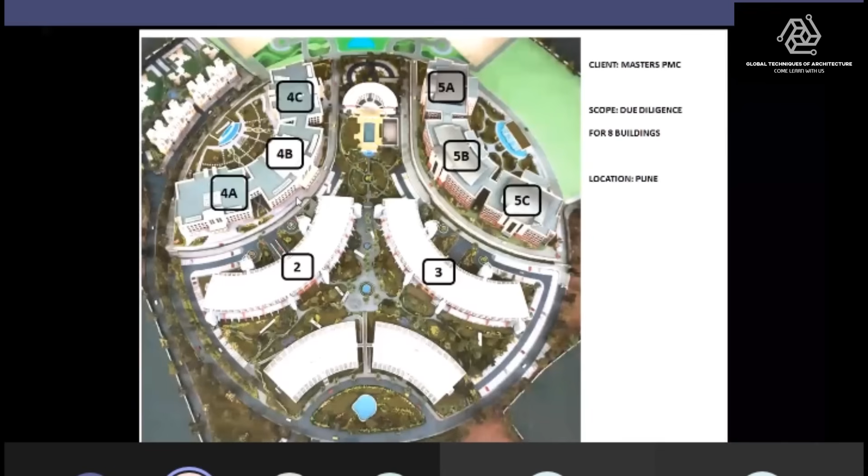Of course, we as consultants have been doing forensic analysis. We did one for a very beautiful campus that SP Shapoorji Pallonji has at Fursungi, Pune. We did the entire audit of this campus, almost 18 lakh square feet for the facades, and the results were really amazing, and the SP team was appreciative about it. We also did forensic analysis of glass breakage for a project at Aurangabad.